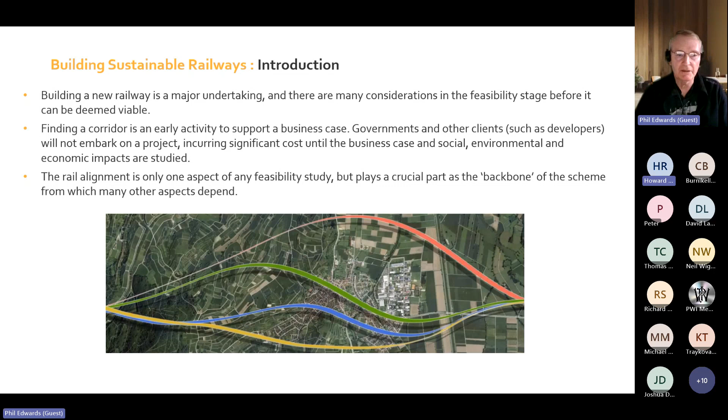So just considering the sustainability aspects of a new project in the early stages, there's considerations from a BIM perspective to consider the CO2 overview early in the BIM project, the life cycle in terms of the construction and traffic, the CO2 emissions from that, comparing all route alternatives as an opportunity to influence, and finding coherence between cost and carbon emissions, and the workflows through the project life cycle.

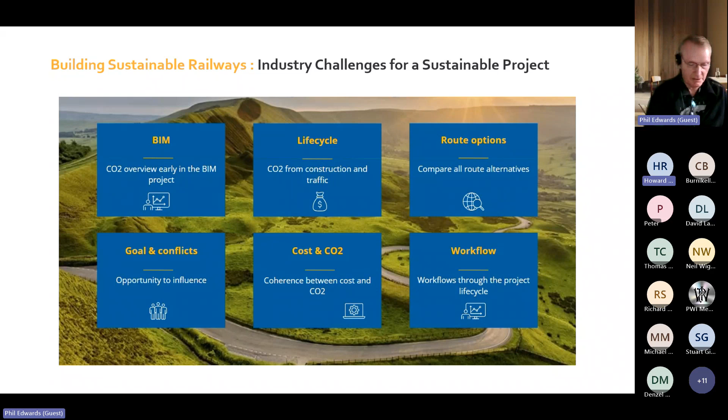So investing in corridor studies then, key considerations such as passenger demand, journey times, frequency of rail services, and the overall capacity to move passengers and or freight between geographical centres. It all depends on having a rail alignment and an outline track layout to study. So once the initial corridor is established, it is often common for a project to be locked into this, except for relatively minor adjustments, improving the alignment within the corridor width in the following stages before construction. Therefore, the initial corridor evaluation and selection is an important task, and investing time and money at the start of a project often leads to a successful project outcome further down the line.

So often in my experience, I've found that projects, small and large, can suffer from having a sort of quick and dirty feasibility stage done initially, which grows and grows in terms of its clarity, and that often is not a great way. It's far better to put the effort in at the start and to get something good at the start, and then not deviate too much from that as the life cycle of the project commences. That would be my experience, having done a few of these over the years.

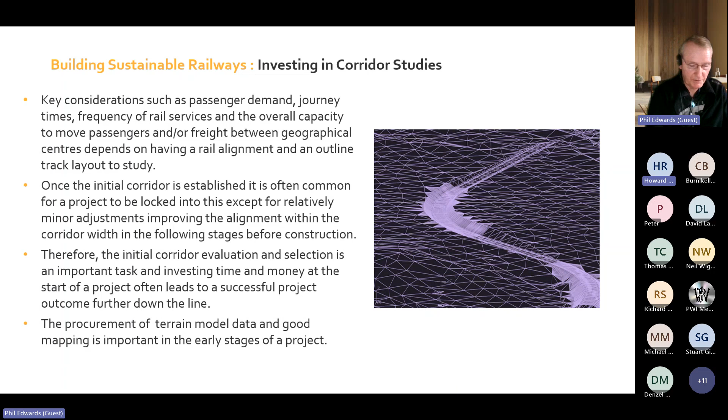So the requirements for a corridor study: the initial corridor study relies on finding an alignment which has as few conflicts with residential areas as possible, which is probably obvious, and seeks to minimise social, environmental, cultural and urban impacts. It also satisfies the minimum geometrical requirements for the project, serves suitable intermediate and terminal stations, keeps civil engineering costs to a minimum, and keeps carbon emissions to a minimum. So finding the most cost-effective and environmentally friendly path through the topography are high priorities, but sometimes compromises need to be made to balance these two important considerations.

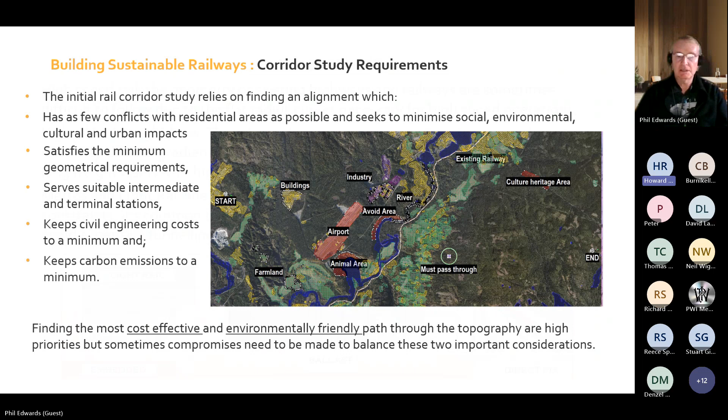So project classification. So up to now, I've talked very generally about building a new railway, but then of course there are going to be characteristics of the various types of railways that we're building. So high-speed rail is one. The geometry of existing highways and railways are sometimes difficult to follow due to the flat radius curves necessary for high-speed operations. Heavy haul freight lines, these have their own requirements as they are subject to relatively shallow gradients and vertical curve restrictions, which are necessary for the traction of long freight trains and with high axle loads.

And then we have metros and light rail lines. Because of the slower speeds and more relaxed geometry constraints, it's common to be able to follow highways and roads into city centres to avoid expensive tunnelling and subsurface stations where possible. So these are very general things, but nevertheless important distinctions to understand between different rail systems.

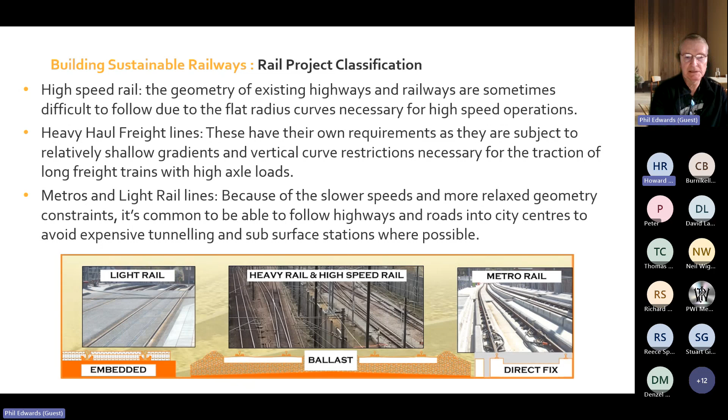Some more corridor study considerations then. Investment in the latest technology available for finding the lowest cost path through the terrain can potentially save substantial capital costs. So modelling alignments across a virtual terrain with the capability of overlaying good quality digital mapping is considered to be best practice for initial corridor studies. So corridor exploration will lead to the development and evaluation of options. This is typically carried out as a multi-criteria analysis which considers the following: engineering, capital cost, journey time, operations and maintenance, constructability and environmental factors, including carbon emissions considerations, are all factors to be considered.

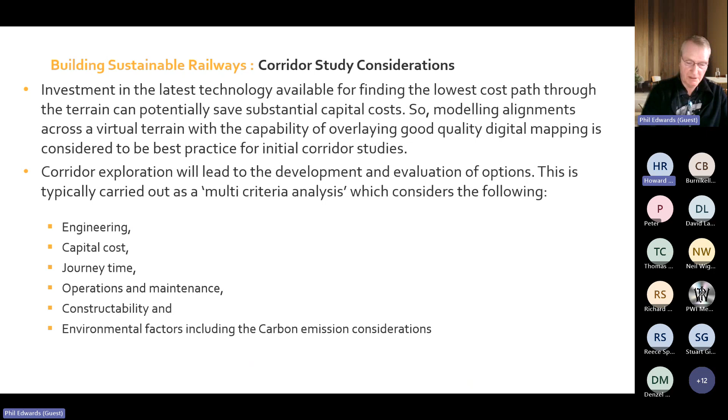So this is a slide on specialist software applications. There are sophisticated modelling applications such as Trimble's Quantm, which is able to analyse thousands of alignments and rank them in order of cost to allow options to be shortlisted. So Quantm will simultaneously consider environmental, community, cultural heritage and hydrological impacts in parallel to consider the crossing of linear features, wetlands, floodplains and geological conditions.

This is effectively a one-stop shop where the model is loaded with all the data inputs necessary to analyse the costs of each alignment and allows selected alignment output strings to be exported and used in other applications such as Bentley Rail Track or different Bentley products. So the image on the right is from Trimble's Quantm application. It's just an example there, just to show you what that looks like.

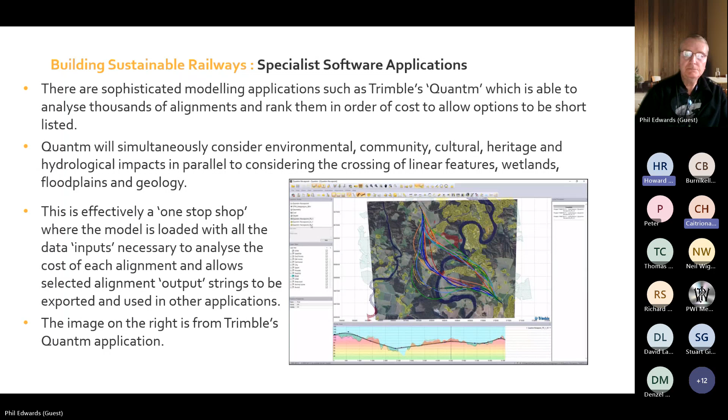So this example here on the screen is an example from a project in Norway. And if I can just point out, in this third column on the left-hand side here, we've got the cost, which is in kroner, and it's giving us the cheapest cost first, and then ranking all of these alignments, which you can see in the middle, color-coded in terms of cost, but also the red arrows are showing you for each alignment a carbon calculation, which is based on the unit rates for the different civil engineering activities, earthworks, tunnels, viaducts, etc.

And also a calculation for traffic, and that is basically something which Trimble have added into this modelling to allow you to look at what the impact of the CO2 emissions will be over the years once this line is built with that alignment. So it's a very powerful tool. The CO2 calculations are a relatively new addition to this modelling. The model has been around many years, but this is an add-on which is now giving the application a more powerful way of selecting alignments.

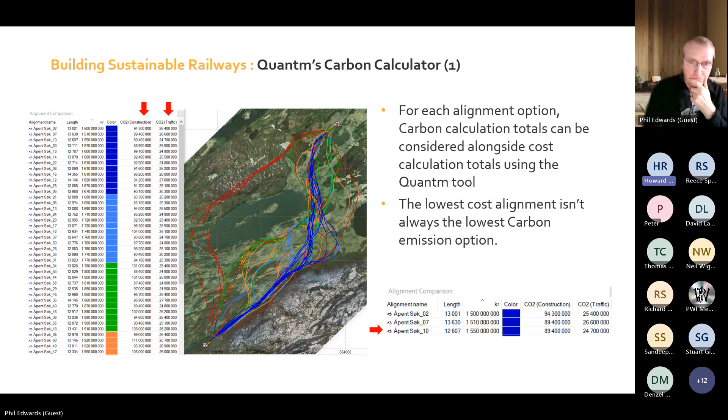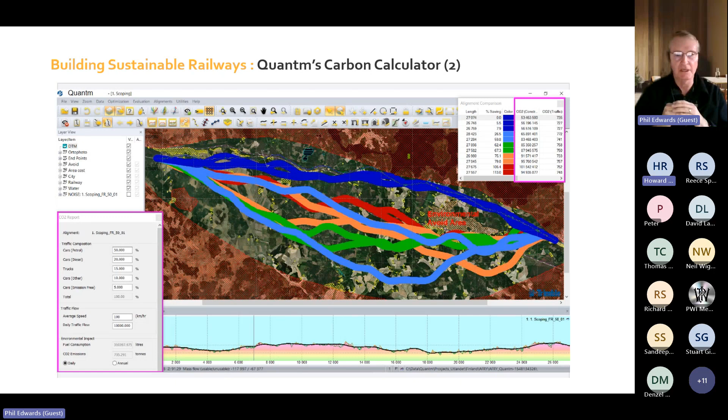So some of the assumptions that we have when we're building railways have been challenged over the years. It was always the case that having a cutting instead of a tunnel was the cheaper of the options. But in actual fact, as time has gone on, this has been challenged many times. Woodlands have been removed in the past to create cuttings across the corridor width, and of course quite a lot of the woodland area is removed in order to create the cutting, particularly if it's a deep cutting and it has to be stepped in order to deal with the stability of the cutting faces.

So over the years, more and more we're seeing cut and cover green tunnels becoming a more preferred alternative to decarbonise the project's carbon footprint. And that also enables sequestration: the reinstated woodland cover over many years can significantly offset the carbon emissions from the cutting construction works. So replanting forests on top of the railway does allow that in time to come back and be a way of getting a credit in terms of the overall carbon emissions.

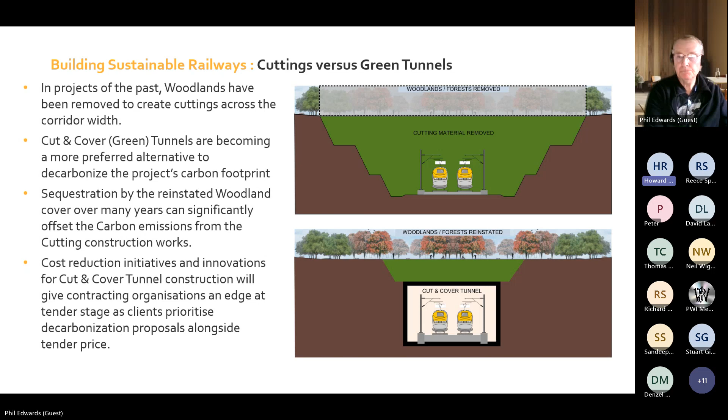So cost reduction initiatives and innovations for cut and cover tunnel construction will give contracting organisations an edge at tender stage as clients prioritise decarbonisation proposals alongside tender price. And also looking at viaducts versus embankments. Viaduct construction is mostly unavoidable above a height of approximately 25 metres, 30 metres. But below this level, there is sometimes a choice between viaduct and embankment.

From a carbon emissions perspective, the embodied carbon footprint in concrete production, including the steel reinforcement, is high. So there is currently research taking place in many countries to reduce carbon footprint in concrete production, of course not just for viaducts, for all concrete products. And the use of secondary cementitious materials, SCMs, to replace some of the cement in the concrete to lower the embodied carbon is a common initiative.

Embankment construction is often lower cost and has a lower carbon footprint, but can also create a social barrier, which prevents free movement from one side of the railway to the other. So alternatively, viaducts allow this free movement as shown in the photo above. The photo above is the Dartford crossing, where the railway goes under the QE2 bridge, an artist's impression. But it shows you the freedom of movement under viaducts, and as you can imagine, embankments create a sort of boundary, particularly if they go through urban areas where you can end up with social differences between each side of the railway.

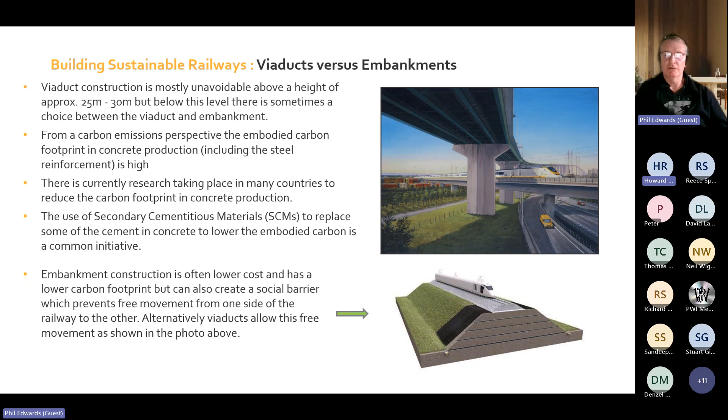Right. Okay. So we've established that calculating carbon is becoming more and more important when it comes to building railways. At the feasibility stage, it was not common in the past to set a calculated carbon baseline for the project. However, this is now becoming best practice as it can drive significant reductions at the early stages of corridor selection. In other words, if you ignore carbon in the early stages of a project, it can come along later, and by that time it might be too late to change an alignment if it's determined that there's a more favourable alignment from a carbon perspective. So it is always better to look at this in the early stages alongside cost.

So it can be taken forward as a baseline to later become a basis for clients and contracting organisations to develop realistic decarbonisation targets. If clients know what the carbon baseline is for a particular alignment that's been chosen, then that baseline can be used when looking at alternatives and at contractors' proposals for building that alignment. They might be able to better some of the assumptions made in the baseline, and that would be favourable to that contractor if they can do that.

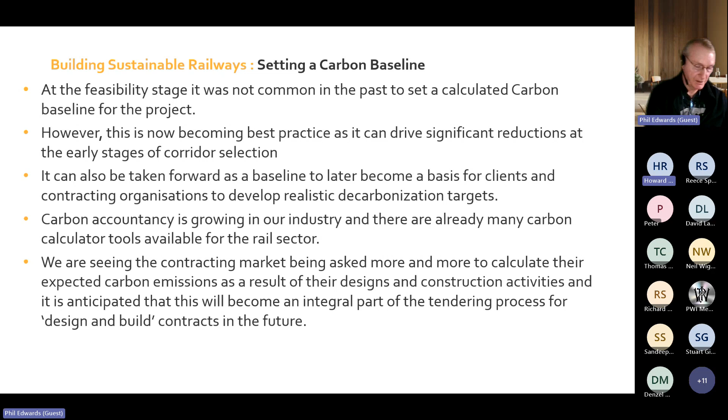So we've talked a lot about decarbonisation, but of course environmental considerations are wider than that. We always have an environmental person looking at this whenever we do a particular project, and they're looking at the whole spectrum of the environmental considerations, and that would typically include protected forests and woodlands that are affected by the project, wildlife conservation areas, heritage sites, sites of religious interest, and any city urban conurbation or

industrially developed areas. And the image on the right there shows what an environmental engineer would be working with, and that would be an ArcGIS type application. Esri is an organization that provides mapping and layers of mapping which allow you to put the alignment across the mapping and switch on and off any one of these layers to enable you to look at the impacts of each at any time.

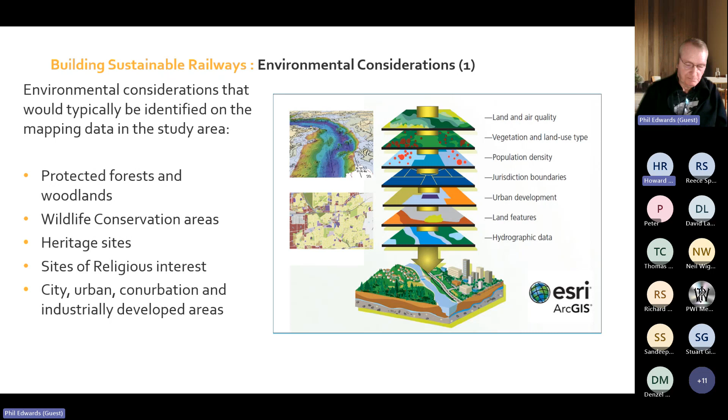So, okay, I kind of skipped through this because I've already mentioned this. I think I'm running a bit short of time.

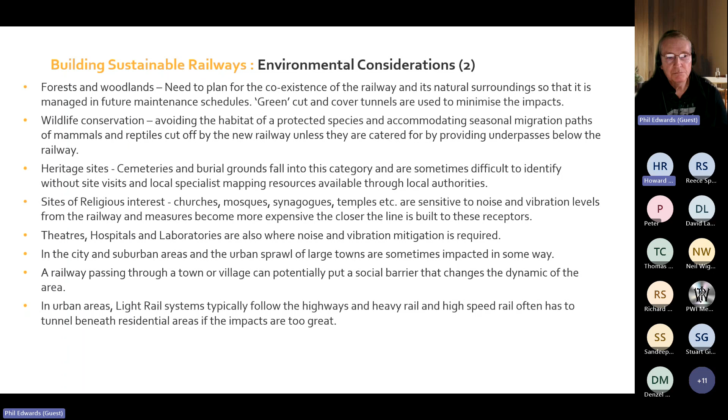Right, geological considerations. So it's good practice to create high-level geological zones which group together geological conditions that have similar levels of risk and suitability. The unit rate of carbon emissions and cost will vary according to the geological conditions, so this needs to be taken into account. What this shows here is 4 zones. This is a very general grouping together of the worst and best and the mid-area conditions from a geological perspective and the respective color coding.

So if you've got that in the mapping, it allows you to also look at the alignment with respect to whether it's going through a yellow, green, rose or blue area, and what is the impact of that, and it is often a driver for changing the alignment, for example, to move it away from a zone 4, where you've got high sensitivity areas such as lakes, natural springs, areas of flooding and erosion caused by human activity.

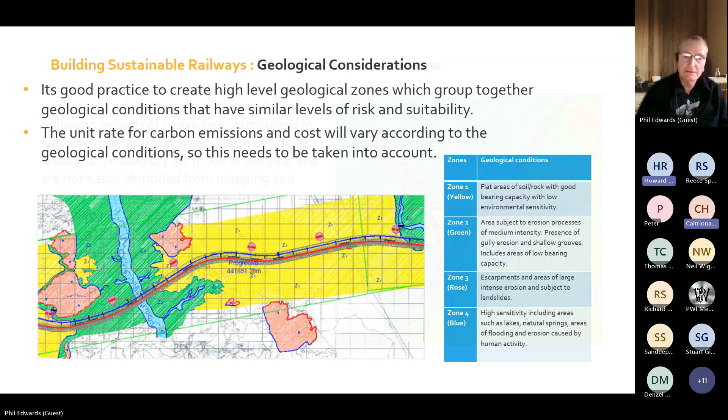And then there's the hydrological considerations. Now, many countries have seasonal events resulting in significant surface and groundwater flows following periods of heavy rain, particularly in hilly and mountainous areas. These can be areas that remain dry for much of the year and not easily identified from mapping and terrain models without the expertise of a hydrology engineer. If you're not able to see water bodies, lakes, rivers in the mapping, it may be because the mapping has been taken at a particular

dry time of year. So there are occasions where flash floods occur and can be a problem for several days, and when you look at the whole picture throughout the year, it's a small percentage of the time, so the mapping might not reflect that, but it's extremely important to be aware of these areas. So building railways across streams and rivers has to consider the worst case water flows, flooding, tidal waters. Modelling the extreme conditions is necessary before rail elevations are fixed.

So how high up is the railway going to be placed to make sure that you've got sufficient flow of flood water and rivers, etc. And of course, climate change is causing incremental changes to the hydrological design requirements. As we go through the years, we're seeing more and more climatic extremes. So that has to be taken into account by an expert hydrological engineer.

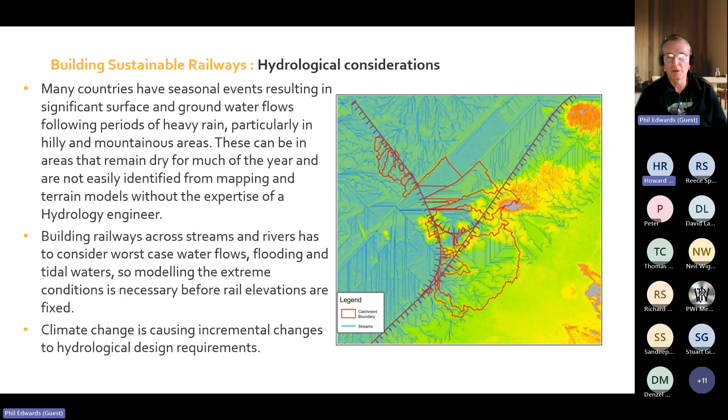Highways corridors: it's good practice to follow existing transport corridors where you can, to avoid the widening of environmental impacts by placing alignments away from these corridors. However, this has its complications, as highway intersection points, as shown here, become very complicated in order to thread the new railway through an existing intersection such as this. It can be done, as is shown here.

If you look closely, there's actually two railways that have been built after this cloverleaf intersection was in place. I know this is an artist's impression, but it is actually an existing highways intersection with the railway being shown as an artist's impression, and these railways were designed and built in this way. So it's possible, if the alignments are okay in terms of the vertical curvature and the headroom that would be required in order to weave underneath and over the top of these roads, then that's fine.

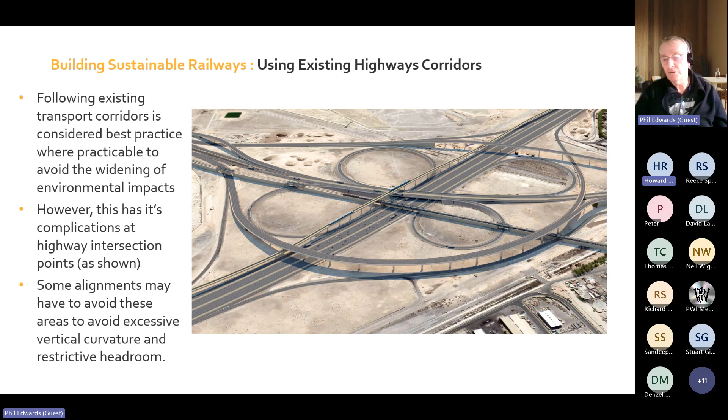So we've got a slide here on technical parameters. So first of all, high-speed rail: minimum curve radius in high-speed sections for 350 kilometers per hour is typically between 7,000 meters and 8,250, depending on what speed is used as the upper limit. Exceptional limits can be lower, but this should be avoided at the feasibility stage. It's sometimes necessary to adopt exceptional limits, so that's usually done in the detailed design or further down the life cycle of the project.

So heavy haul freight lines: typically gradient limits are much flatter than for passenger lines, and restrictions are placed on vertical curvature where the longitudinal profile rises and falls within the length of a train. So this is all about traction of the freight train. Very long and heavy freight trains can stall on steep gradients or gradients which have got multiple vertical curves, and so therefore it's necessary to be able to restrict the curvature to enable these very long and heavy trains to negotiate those alignments.

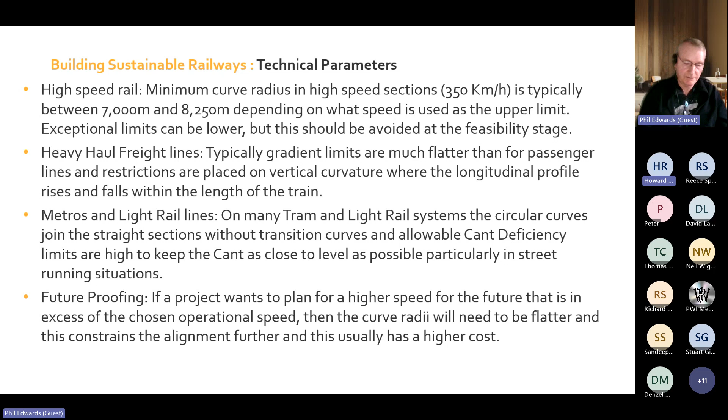Some track layout considerations. So at junctions, on the left there's a traditional flat junction with a diamond crossing. Diamond crossings are more onerous in terms of maintenance, with the two obtuse and two common crossings continually getting a bashing, and also there are maintenance issues off the back of a junction, particularly where the branch is curved and we have to have a flat zero cant diamond. That can cause issues with twist off the back of the diamond, so therefore it can be a maintenance issue.

To improve that layout, to eliminate the diamond, we've got a flat junction with a larger footprint, of course, but there's many benefits for speed and S&C maintenance. If you've got separate turnouts, like a turnout and a crossover, to enable you to still do the same thing, it takes more space, but on new railways, if you've got more space, it's much better to do a layout like this to avoid the traditional diamond crossing flat junction.

And then, of course, you've got the operational requirement to need grade separated junctions, which will allow conflicts to be removed, so that you don't have one train waiting for another to pass over the junction before it can go in the opposite direction. The up direction can be completely separate from the down direction, if you like, in order to keep traffic flowing.

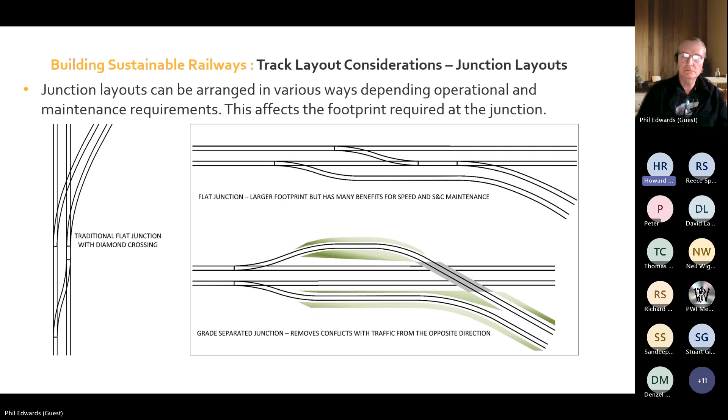Stations. So we've got some examples of stations. The intermediate station layout can have crossovers either side to allow the intermediate station to also be used as a terminal station in the event of blocking the line on one side or the other.

I've got a 4-platform terminal station layout. Again, typical crossovers, and a simple 2-platform for a tram, and in that case the points sometimes will be self-acting, which allows trams to pull out of the platform into the head shunt, with the flange of the wheels of the trams actually operating the points, and then it sets back into the platform, and that avoids having to operate the points remotely.

And then at the bottom of the screen there, we've got a typical 6-platform arrangement, which is showing a perturbation layout for 4 platforms. So what we mean there is that if we get a problem with any of the points where they need to be clipped out of use, the blue layout at least allows 4 platforms to stay in use. We don't like using scissors crossovers with the diamond in the middle, but if it's for perturbation reasons only, then it doesn't get much use, and therefore it's relatively low maintenance. So it's acceptable as a perturbation layout.

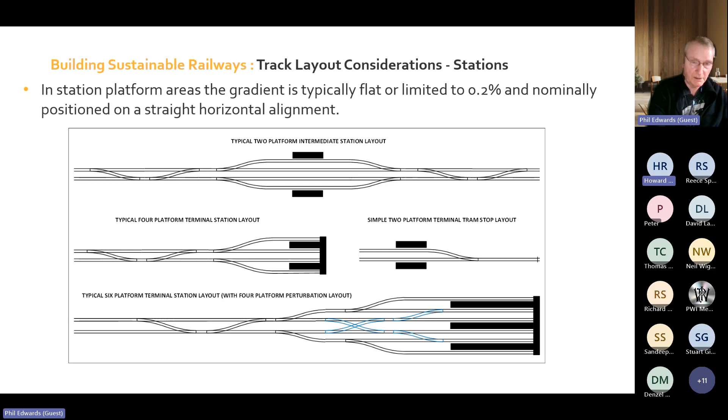Just a slide on S&C types. So switches and crossings can be an early consideration where they're located at junctions. In my experience, this has not been the case on many projects. We look at the S&C type, very general junction arrangements, without really thinking too deeply about the types. But the footprints of the turnouts can vary a lot, obviously due to the turnout speed, and also according to the supplier for the same speed.

The geometry of the diverging paths can vary depending on the supplier. So all these things really lead me to always advise that these things should be looked at in the early stages of projects. And when it comes to procuring contracts for building civils and track, I would always advise to not delay the procurement of the switches and crossings contracts, because they can have an impact on the civils design.

You can imagine here, as this image shows, that if you've got more than one option for the same speed junction layout, let's say this junction was on a viaduct, then you would need a different design for that viaduct if you had a different S&C supplier. And you could build for a footprint which is like a catch-all, which would accommodate both suppliers' geometries, but then that would be more expensive and more carbon emissions. So it's always good to consider the S&C procurement at an early stage and not leave it further down the line.

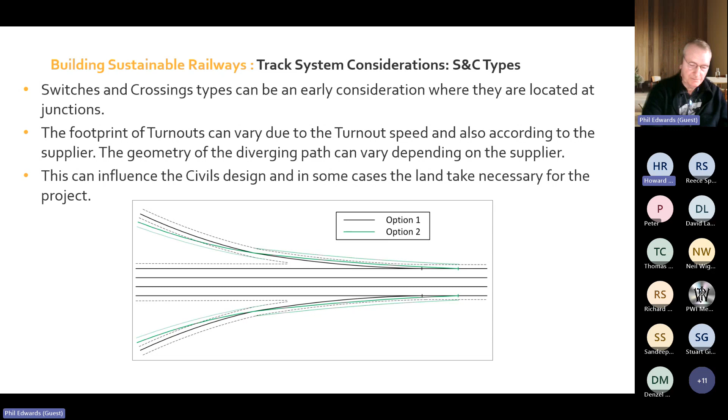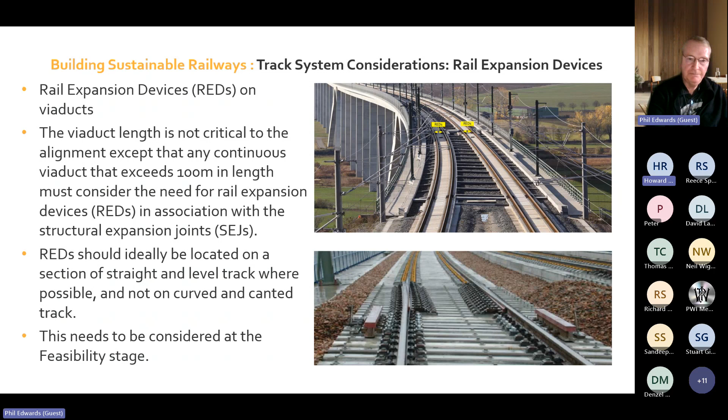And then we get into track form considerations, slab track versus ballasted track. Ballasted track is considered to have a lower carbon footprint and a lower capital cost at the construction stage. But then the ongoing maintenance of ballasted track, for example using on-track machines, tampers, etc., can increase the whole life carbon footprint. Whereas slab track, you don't need to tamp it, obviously. So there's a saving there in terms of whole life carbon footprint. Slab track is a low maintenance option and has been adopted on many railways in preference to ballasted track.